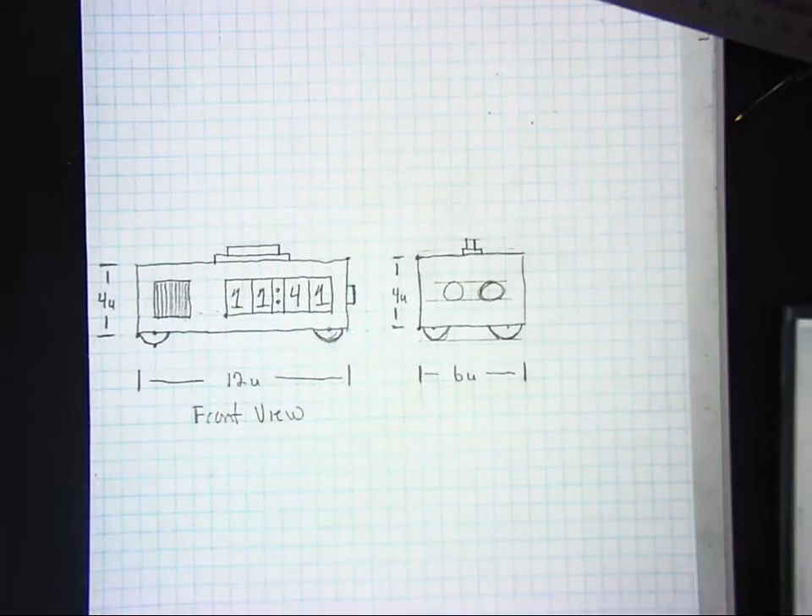Alright students, in step number 3, we're going to show in this video how to draw the top view. Going to page 129 in your textbook, you can see here, this will be the completed picture. Again, what we have here is our 3D image of our clock. We have drawn the front, the right side, and now we're looking at the top view.

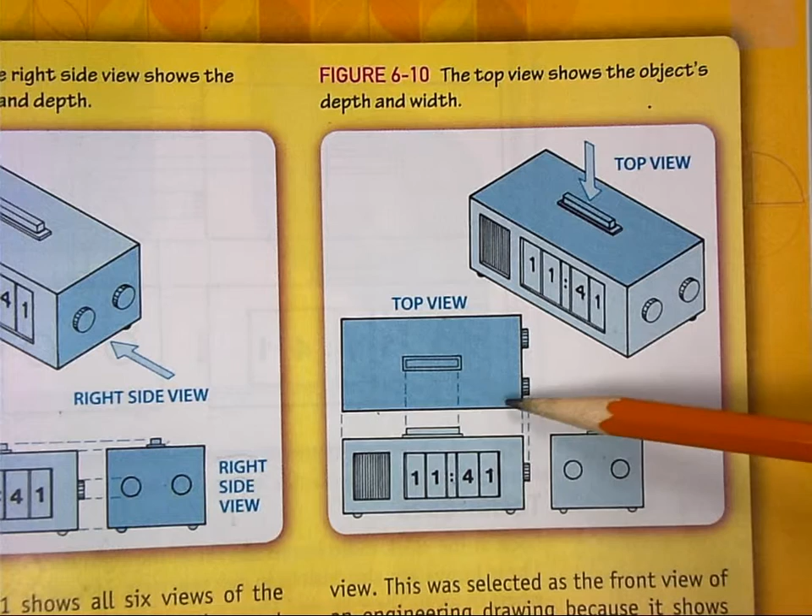You can see in the top view that the width between the front and the top is shared. In this case, the top view also uses the depth, and we'll show how to use orthographic projection to be able to draw that properly. Our finished product will look like this. You'll see again, here are my front and right side, and here will be the top. This is what we mean when we speak of orthographic projection.

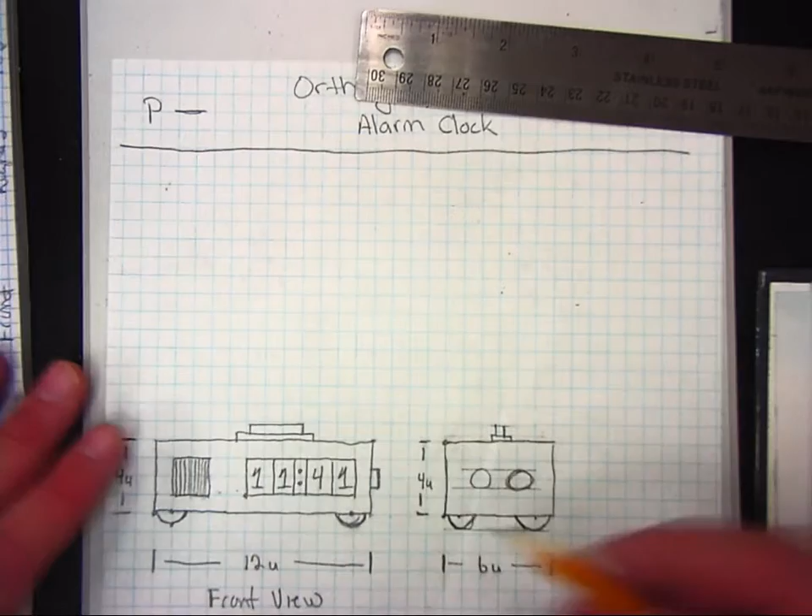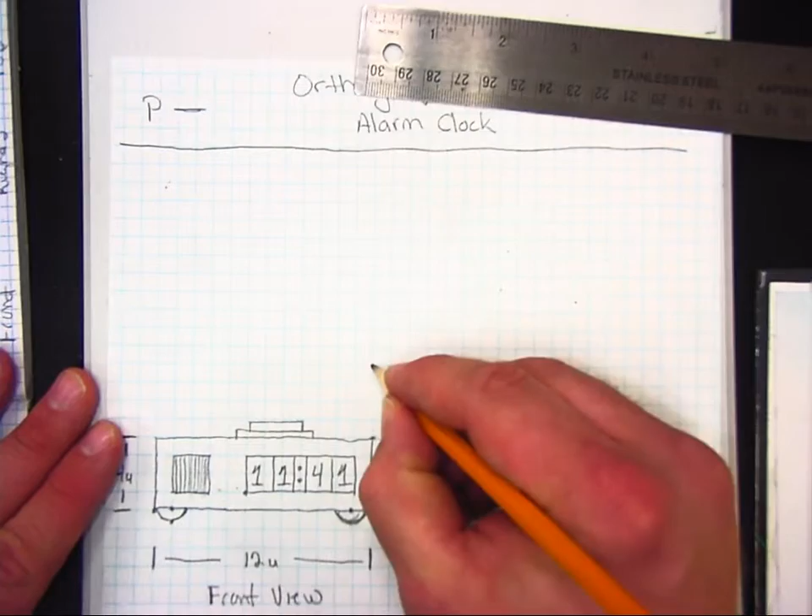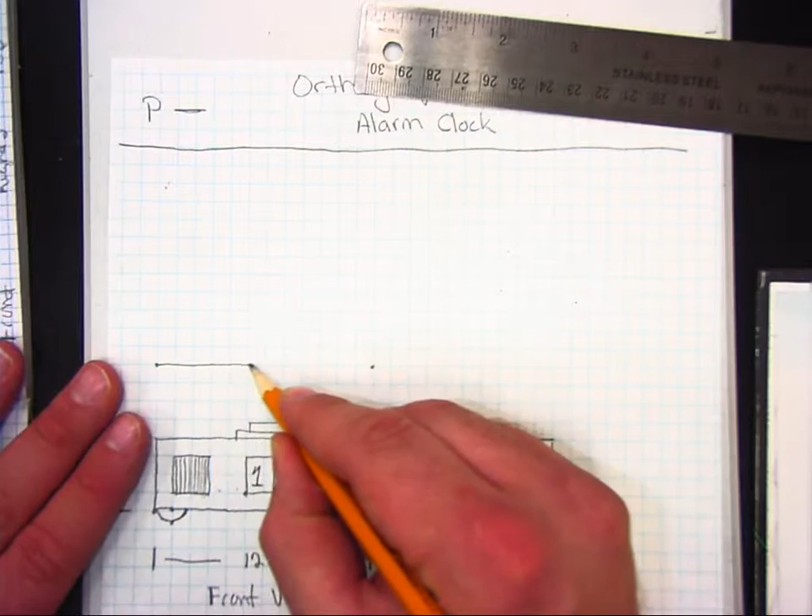Let's go ahead and start. It's important to keep the distances equal. So because this drawing is 4 blocks away from this corner, I'm going to keep this one also 4. 1, 2, 3, 4. Have that as my starting point. Place another dot at the corner equal to the width over here going straight up. Now I'm going to go ahead and draw a line representing the width for the top of my alarm clock.

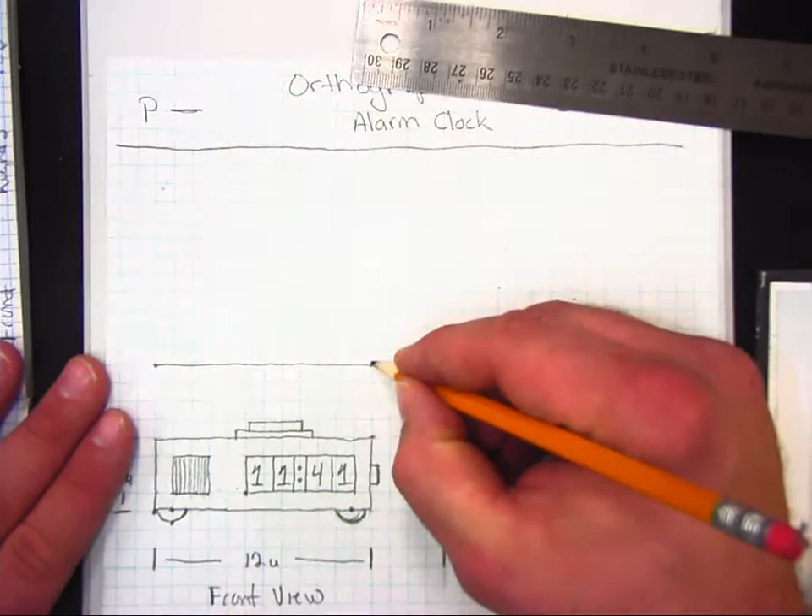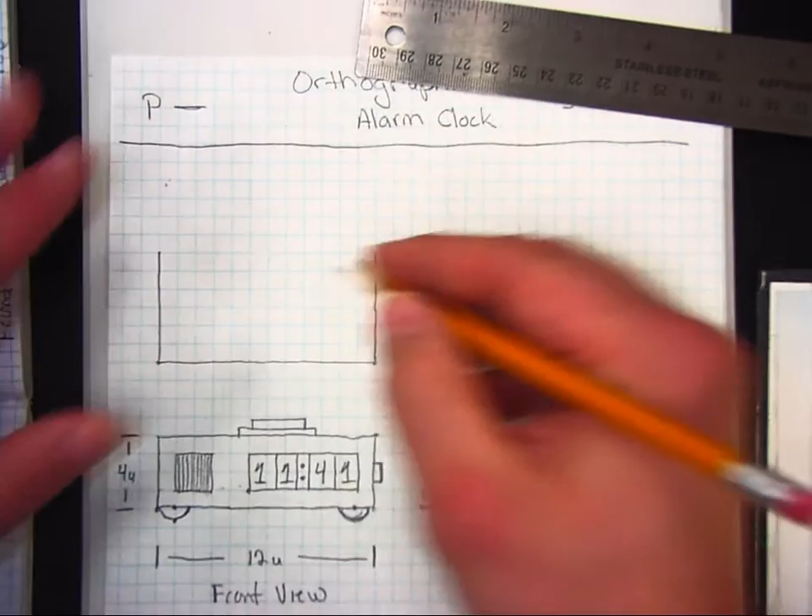The depth is already determined for me over here. It's 6 units. So I'm going to come up and finish the top view. At this point, all we need to do is add in the featured elements that are seen from the top view. That would be the knobs for the clock and also the snooze bar.

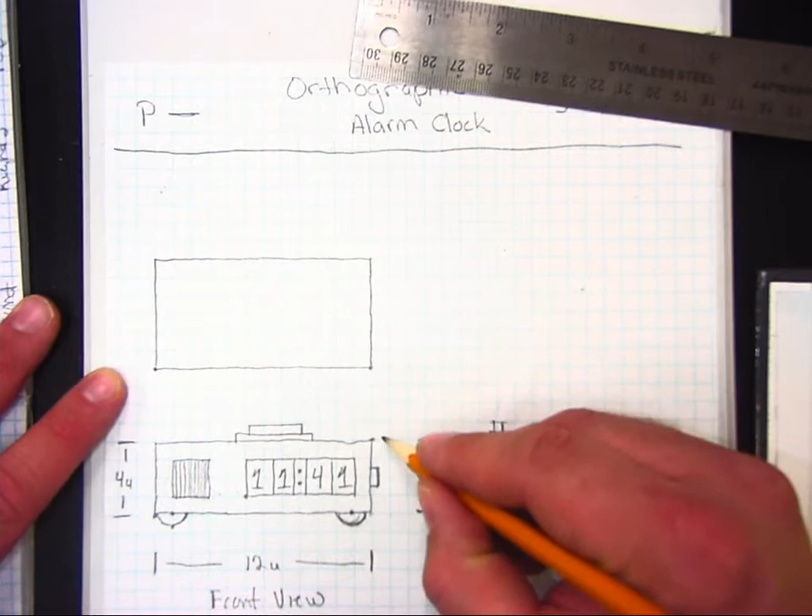Here's how we're going to do this. We're going to go ahead and draw a 45-degree line starting here at the corner and going diagonally through the corners of our graph paper. What this is going to allow us to do is to project at a 90-degree angle the features that are drawn here on the right side.

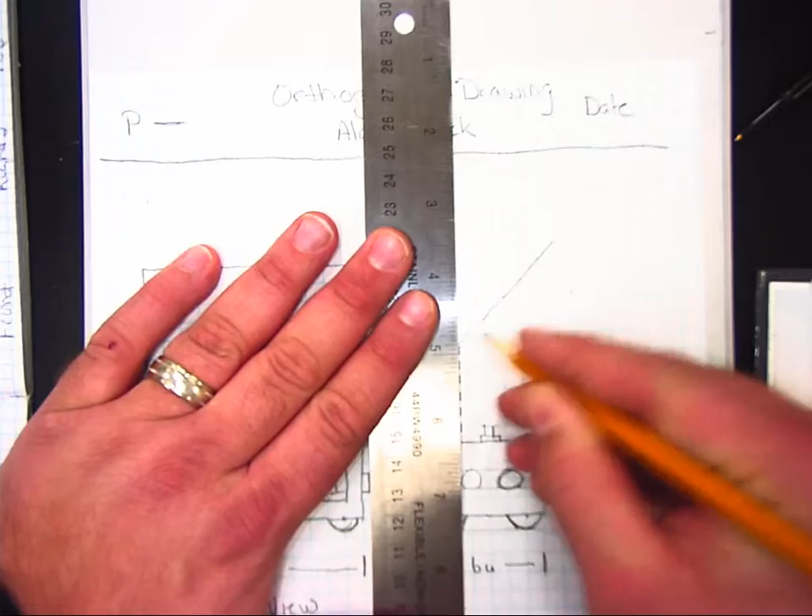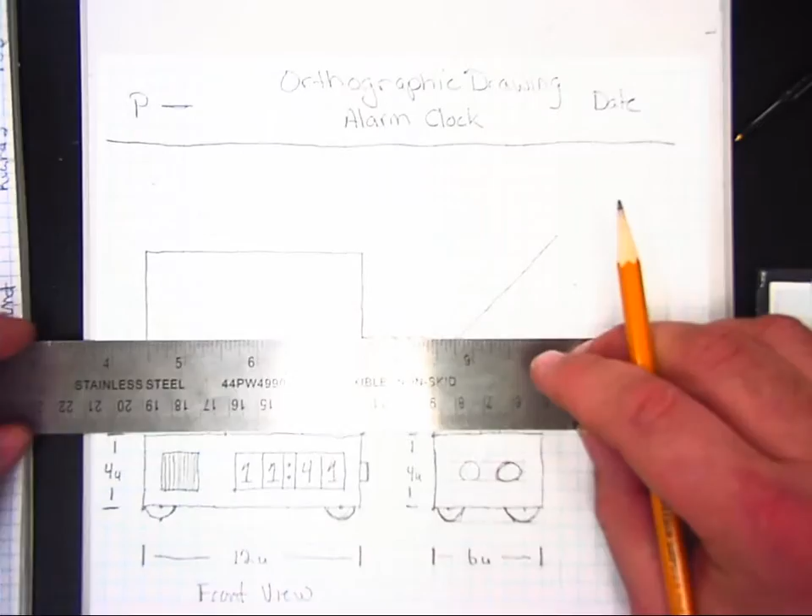Let's watch. I'm going to take my ruler and place it here on the outer edge of my first knob, and all I'm going to do is make a dashed line that's going to go up to the diagonal line. Now I'm going to turn my ruler 90 degrees and I'm going to repeat the process of moving it over. This is the proper location of my knob. I'm going to repeat it for the other side.

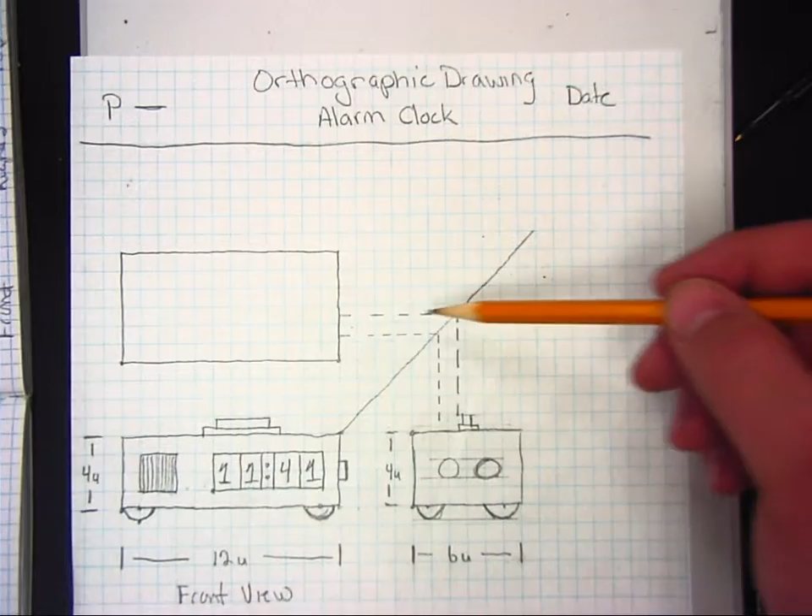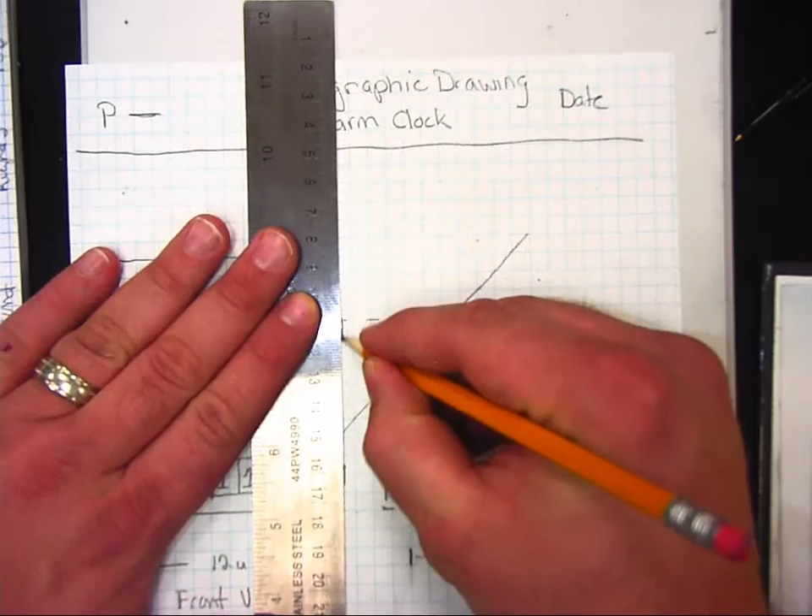As you can see, I've transferred the depth of the knob over and onto the top view. Now, to determine the width of my knob, I'm going to use my ruler, placing it on the outside edge here from the front view, and then drawing down. I've accurately projected the location and the width of my knob here on the top view by using the right side and front views. I'm going to repeat the process here on the other knob and then move on to the snooze bar.

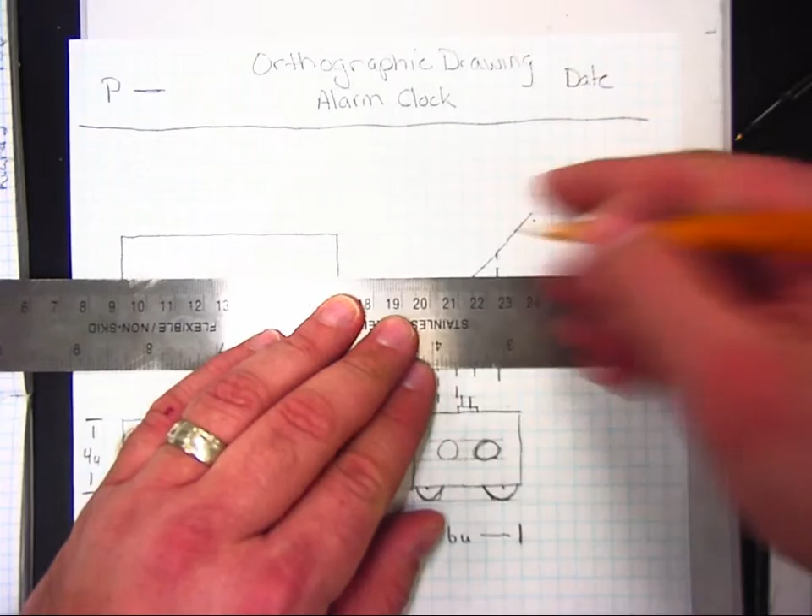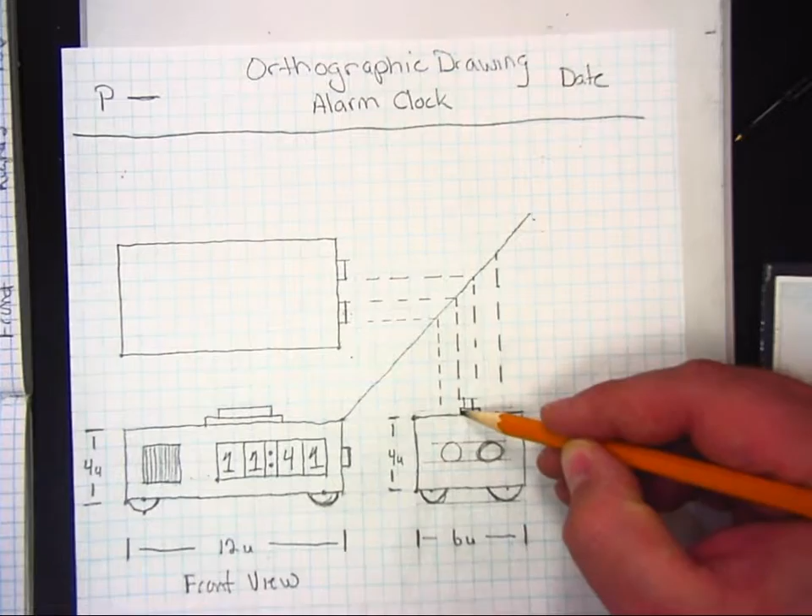So now you can see my drawing has both knobs located on the top view. Now I'm going to go ahead and transfer the snooze bar onto the top surface. You can see that this dotted line already represents the outside edge here of my snooze bar, so I'm going to use that and carry that into the middle. Again, all I'm going to do is make some light lines that I'll use for construction, and I'll come back afterwards and darken them in.

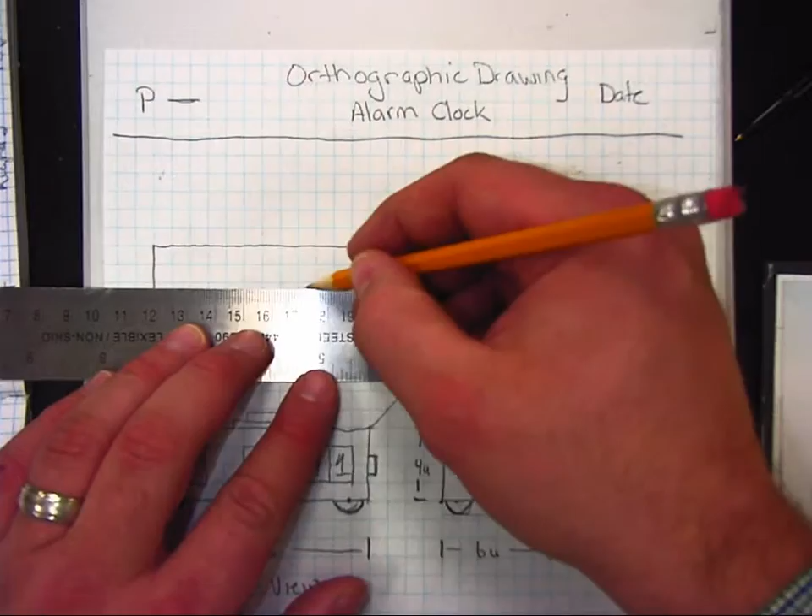Now I have a series of lines up here that I can use. Again, I'm going to transfer my width from my front view to determine my overall size.

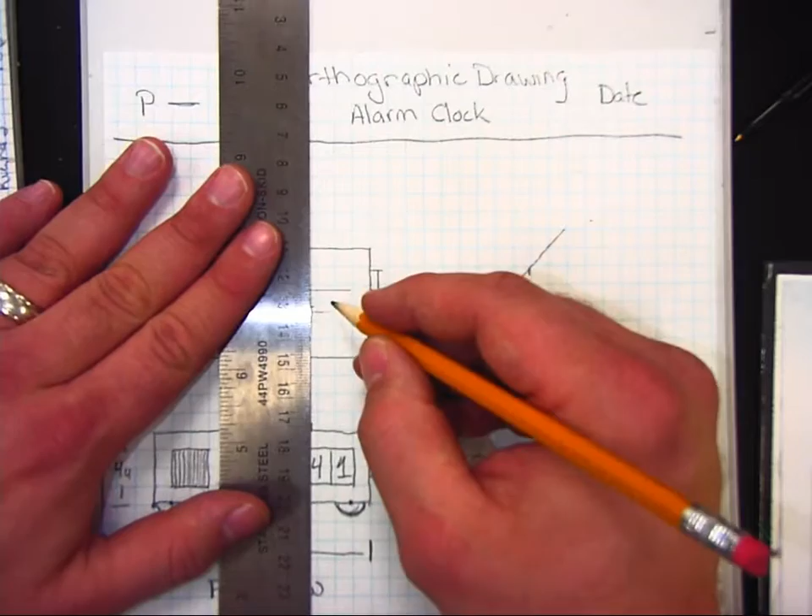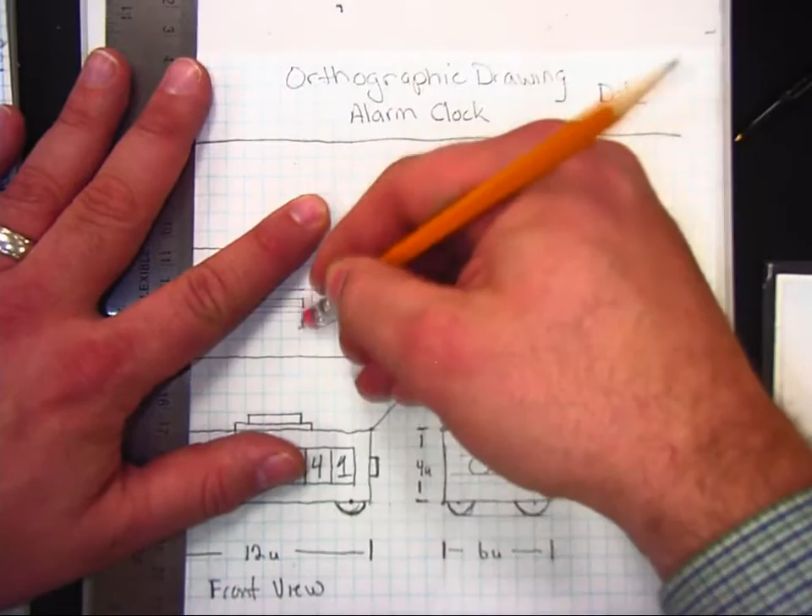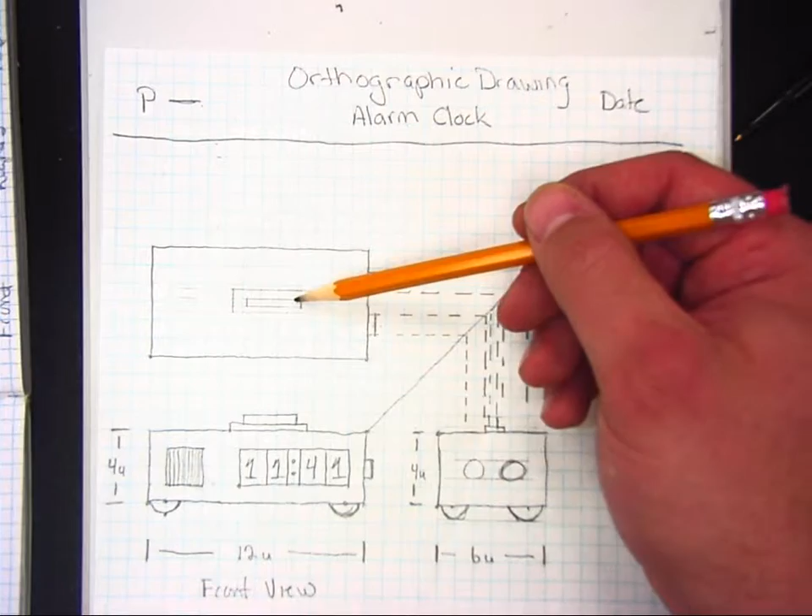You see, by erasing those extra lines, I now have a clearly defined snooze bar located on the top. Using orthographic projection allows me to take accurately the depth location of my items and transpose them onto the top view. The combination of using the front and the right side allows me to get a complete picture on the top.